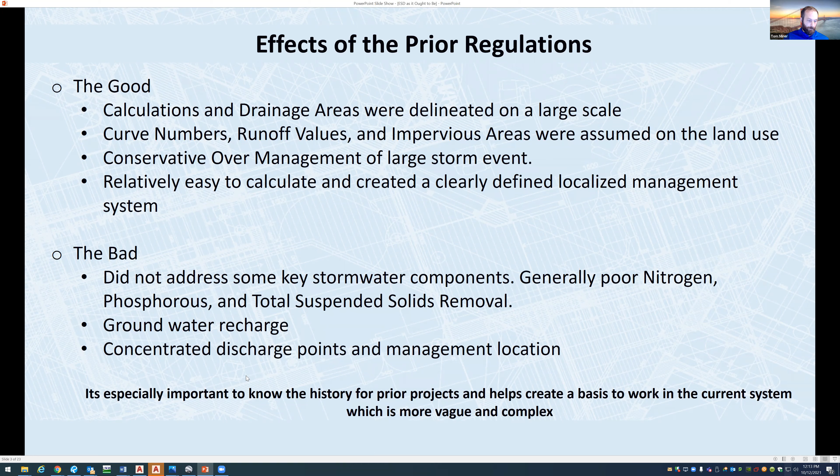Knowing how these older projects developed their calculations can help us work within the current system, so that we're not over-designing our site now if we know we have available quantity in these ponds, or there was additional water quality available, and the county or municipality lets you get some credit for that. You might be able to undertreat the ESD that's now required because we're already providing additional management.

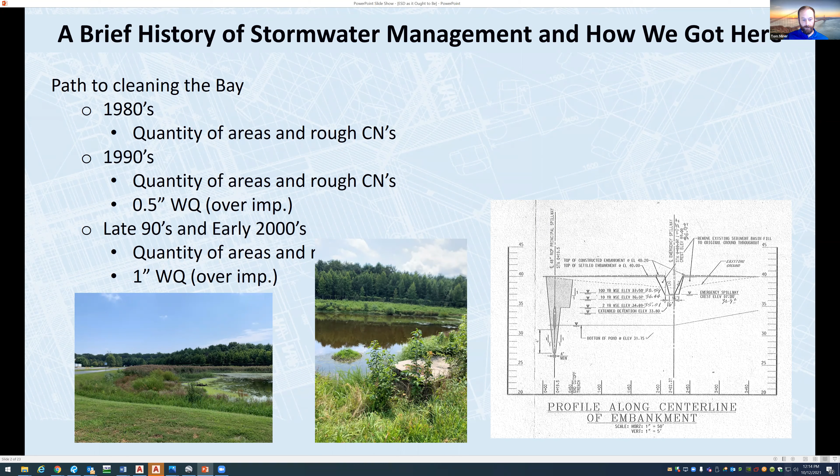So, a brief run-through of what ESD is. I think a lot of us on here are already familiar with what it amounts to.

The definition by MDE is a comprehensive design strategy for maintaining pre-development runoff characteristics and protecting natural resources. ESD uses small-scale stormwater management practices, non-structural techniques, and better site planning to mimic natural hydrology and runoff characteristics, and minimize the impact of land development on water resources.

That sounds really great, but this statement lumps in a lot of things that we're not able to change about our site. If a developer wants to put a giant warehouse on the site, we're not going to be able to have infiltration on a 1 million square foot Amazon big box.

We're going to be paving it. There's not much you can do about it. And then land development, mimicking runoff characteristics with non-structural techniques.

Certain things in zoning codes are requiring us to have a certain amount of parking, even if we want less parking, we're required to do certain things. The 2000 manual focuses on changing zoning code requirements, but there was no teeth to force the counties to do that. So we've really been given an intent without any change in our local codes to actually reduce the amount of parking, reduce the amount of roads we need, or the width of the roads typically.

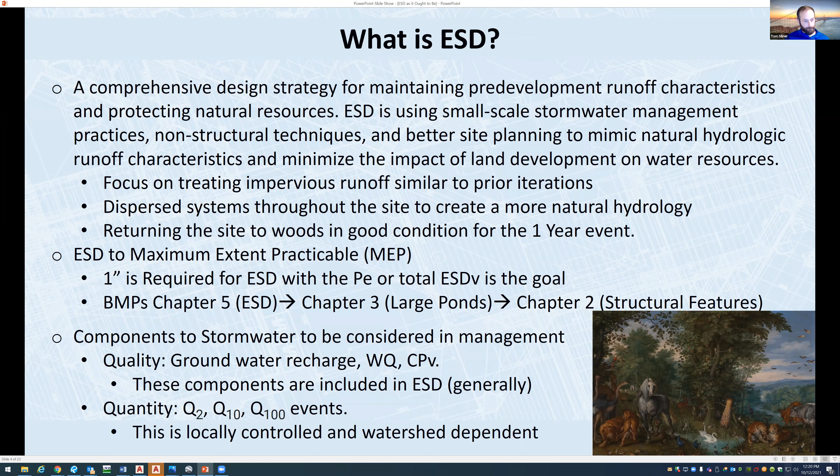Going into the complexity, I'm sure a lot of you have already done a site evaluation to understand what the calculations are required for figuring out what your ESD is for a site. There's a lot more components than there used to be. You have various study points. You typically had your soil types, but your study points are now more focused on localized points of discharge.

Your existing and proposed impervious are the same, but because you're trying to focus it on individual smaller facilities, you're not taking that kind of approximation of amount of impervious or curve number. You're taking a very specific number, a specific area that you're having to treat, because every square foot of impervious is costing you that much more to treat.

You've got to include your limited disturbance. If that changes, then you've got to change all your calculations, and that progresses through your report, progresses through your plan sheets, and it just results in a lot more accounting.

The key calculation is ESDV, which is your PE value, determined based on your impervious area. Your RV, which is your impervious area times this basically dimensionless coefficient, and then your total area, which is in square feet.

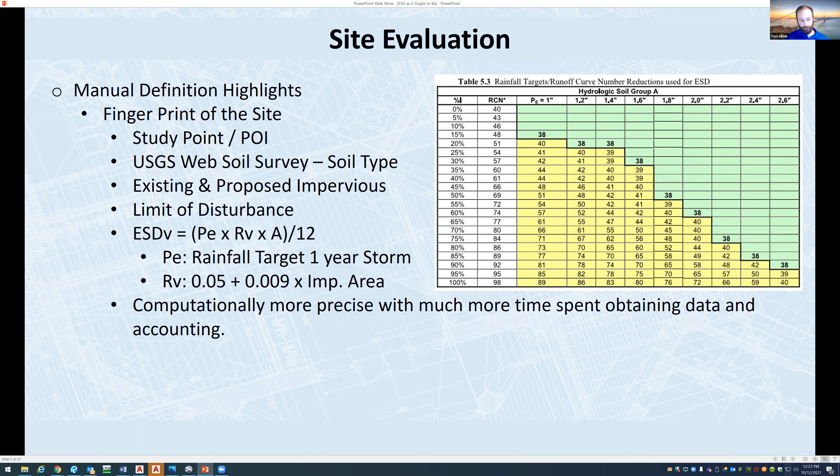Computations are much more precise at the end of the day, where it takes a lot more time to obtain the data. We can do quick approximations, but at the end of the day, when we need to do an exact site fingerprint of the ESD, it definitely takes more time than it used to with the prior delineations and prior computations that we used to work with.

Similarly, timing wise, we have to go through a 3-step process unless the county waives it—sometimes the county will waive the site requirement if it's a small project—but typically you're required to provide a concept, a site, and a final. They say it's a 3-step process, which is not necessarily really the case. There's a concept, site, and a final.

Then there's also a submission for, depending on how the county works it, a bonding and approval set and submission. So after they give you final approval, you then have to submit for bonding and signatures, and then Mylar and recordation of the plans.

And then after all of that, you then have to go to a pre-construction meeting. So if you're getting a concept approval, then you go to site, and then you go to final. If they give you final approval, depending on how the municipality works, you still might be 2 months away from being able to break ground.

So a lot of times developers are going, we've gotten final approval, what's going on? And you're like, well, we still got to go through all this other paperwork before we can actually even break ground for a permit, because after final, you're now coordinating with the sediment control inspectors. You're getting bonding and paperwork in order, your various agreements.

Some groups will allow you to submit that with the final, but a lot of times they'll want that afterwards when you're submitting the final Mylar set or the recorded set for signature, which is sometimes not part of the final process. Versus, in the past, it used to be you would just submit your documents, then they turn around, provide comments, and go through the sets of reviews a number of times as necessary to get the documents to approval. In my opinion, this kind of just makes it a much longer process.

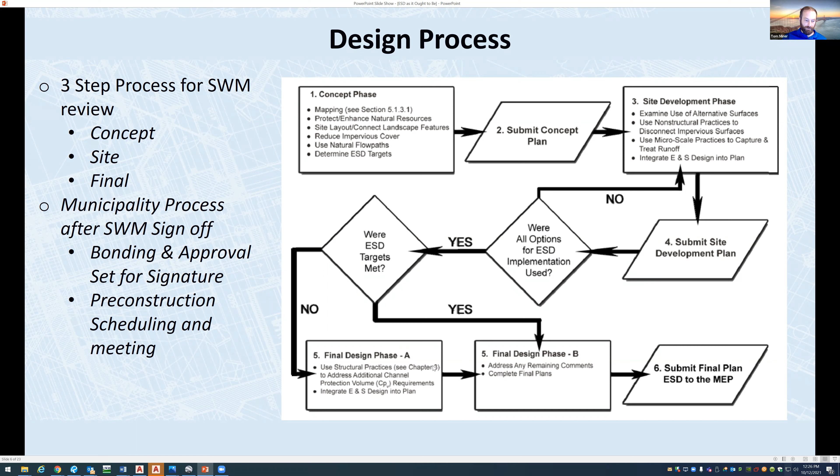And here's just their flow chart of how they kind of envisioned it to go. As you can see, there's a couple circles, which you can kind of get lost in as you go through the process.

Interpretation, intent, and then communication. I think a lot of times this particularly gets some confusion, and the reviewing agency, I'll say for lack of a better term, blames MDE for their interpretations.

The manual defines ESD to the maximum extent practicable. It defines what Chapter 5 facilities and Chapter 3 facilities are, and what's acceptable. And then it defines all these components. The definition of what they are is fairly clear.

The question is how does MDE, the review agency that reviews the MS4 permits that each county, town, or government entity has, these different permits, provide the review and compliance. MDE is going to be reviewing them based on the manual, and I found that they typically give a fairly lax review of the items. They're not, as long as you have justification and proof of why you're doing something.

There's a lot of variation between counties. So my take is if you have a lot of variation between counties, and the only commonality is the MDE, that means MDE is allowing that variation to occur. So it really comes down to the county's definition of what ESD is to them and how they want to function in this manual to allow for treatment of runoff to the bay.

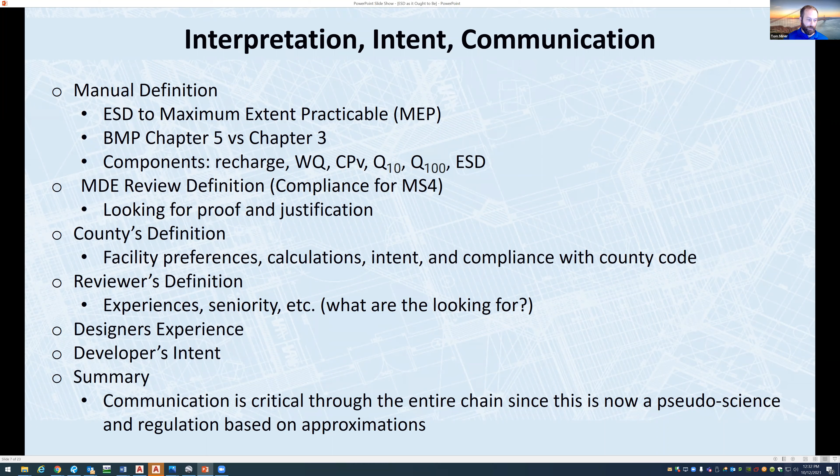Kind of hit on this a little bit. Stormwater Management Act, that was done in 2007, references the 2000 manual, and it's written in the COMAR, so it really gives very limited flexibility with MDE to revise things they found that don't really work as well. So they try to release clarifications, and those clarifications, they're trying to work within the current rules. They keep wanting to do updates, but it takes a little bit of political will to update a manual.

And then additionally, things to consider outside of all of ESD is really just how that integrates in with all the other permits and regulations we have to incorporate when it comes to stormwater, whether it be wetlands integration, buffers for floodplains that are state and federal, and then local requirements.

How does each county view these natural resources? Do they want to protect them at all costs? Do they really need to see anything, or is this something that they just need to check a box off that you show steep slopes, or check a box off that there might be bedrock showing in one location, or are you going to have to do a full report to show them that X, Y, and Z is okay?

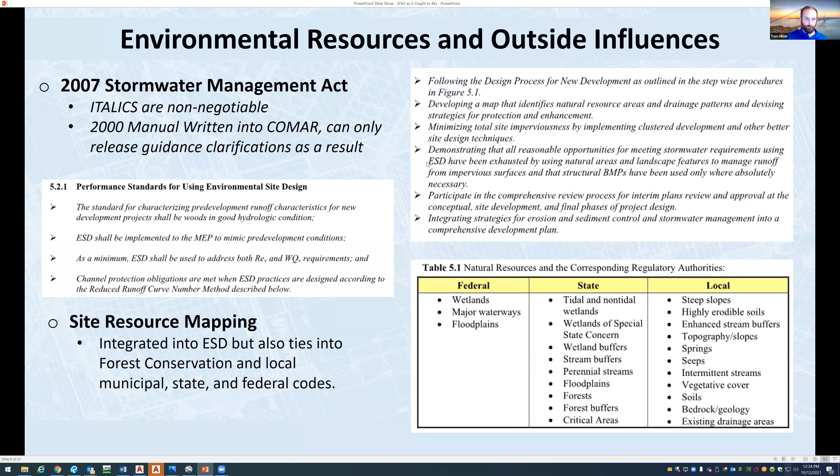So that's something that's in the manual, so the counties and the states have to adhere to it. And then, the one thing that is always interesting to me is that they have certain italicized areas in the book, and those are non-negotiable items to the county, versus things that aren't italicized, or just regular text, which are able to be worked through potentially, depending on the willpower of the county to let the engineer design according to their needs.

So the manual gave us a bunch of different alternatives. We have alternative surfaces, non-structural practices, microscale practices, but then they give a summary of site development strategies, which have very little to do with what we can do on our site, because this is really zoning code, or various codes, or site driven designs that we can't really modify. A 33-foot turning radius, I believe, a lot of streets, narrower streets, we can't change that, and the county's not going to change the roadway code and various rules to meet these requirements.

So some of these things, when you read them, you're like, okay, great, they obviously didn't think through some of this design, because they're putting it in the manual like, this is how you're going to meet these practices and design accordingly, but it had nothing to do with stormwater management. It really just had to do with zoning requirements and site layout, which we have very limited flexibility in, depending on the type of use.

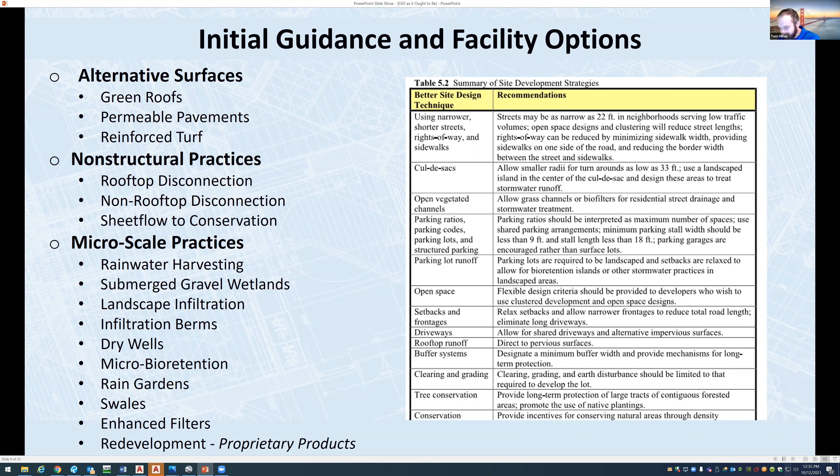So going through just a quick, I know a lot of people are probably very familiar with the type of uses for this, but there's a bunch of different types of practices, and I found that all these practices fit for a particular use. And when I get into a site, I see what the site is, and then I can use that application in this location, I can use this application in this location, really with the focus initially of cost, but then not just cost, but then how it encumbers the property later, and then the kind of maintenance costs that someone's going to have to bear later with that as well. So your maintenance, your cost to construct, and then how it impacts someone's property after that.

I mean, if we provide a green roof, it might be great, and the client might even be willing to build it if they're selling the product at the end. But is the homeowner going to want to maintain a flat roof that they have to get up on there and mow every other week? I know I wouldn't. So green roofs, if you have a client that wants to do that, that's great. I would probably charge them a higher fee, just because if they're willing to spend that money on a green roof, they probably have extra money to spend elsewhere.

It becomes a semi-impractical item. It requires a lot of structural design components to support all the additional weight. They only treat themselves, so it's an extremely expensive way to provide self-treatment. It looks cool, but it's the most expensive way you can provide very little treatment for a site. But if it increases the marketability of a site, maybe it's worthwhile.

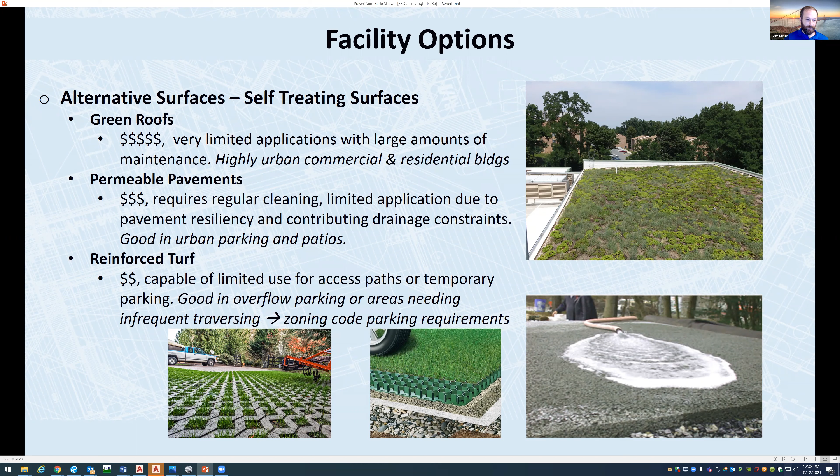Reinforced turf is definitely a more applicable need for certain sites, particularly areas like churches where you have overflow parking lots and the zoning code allows it - where you're only going to need it once a week or once every few months, for traversing a site, and you don't want it to get all rutted up. I've used that frequently, and it's a good product. It's not terribly expensive, and it's cheaper than a parking lot. So you get your permeable surface, and you don't have to build a parking lot if you are allowed to by zoning code, to provide your overflow parking, or if you don't need as much daily parking but still need it in peak conditions.

Other items, particularly rooftop disconnects - the non-structural practices are great, but they do take up a lot of room for disconnection of runoff, and you only get 1 inch of treatment. So in municipalities that require greater than 1 inch for full ESD treatment, this only gets you partially there. Depending on the municipality's interpretation, this can be a limiting application. However, the more lenient municipalities, this can be a great way to just not even have to install a facility.

A problem with non-rooftop disconnections and sheet flow to conservation is you are encumbering that area that's supposed to be lawn - you can't build anything there in the future. If you have to build something there, then you've got to do a whole other stormwater management practice to mitigate for what you're losing with your disconnections. But they're all very cheap as long as you have the land.

The biggest difference between non-rooftop disconnection and sheet flow to conservation is in the pathways, for paths - this is a path we did in Harford County. It was convenient because we had slopes less than 5% in some areas, and we just had to put in a level spreader downstream of the path, which was just some 57 stone, and then we could have that sheet flow off into the woods, which was going to stay woods perpetually. So it was basically a free alternative when building our path to get credit for it.

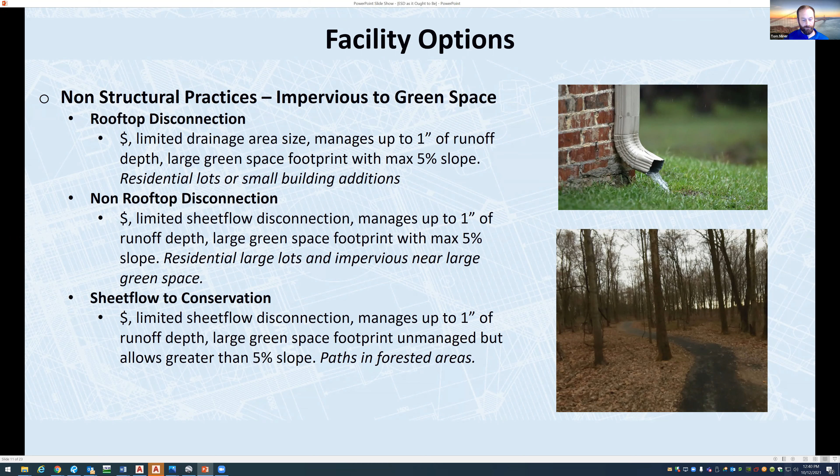But all these practices are really good when you have a lot of space. They start to really fall apart as soon as you get into more dense urban type settings or where land values are very high.

Microscale practices - this is kind of the bread and butter for a lot of ESD. Rainwater harvesting is very rarely used. I feel like it's quite hard, particularly in Maryland, to need to harvest. We're not in an arid environment, so typically we don't need to water our plants excessively unless maybe we're at a golf course. So to spend the money for rainwater harvesting for watering doesn't make much sense.

And then when you look at purple water reuse for sewage, there's just not a lot of demand for a facility's purple water versus the amount of runoff you obtain during a rainwater harvesting event - it's very minimal, and you're having to put in tanks and pumps and everything else. So there's occasional use where it's applicable in high urban settings and things, but it's fairly rare unless you have a particular want or need for it.

Submerged gravel wetlands are typically my go-to when we have poorly drained soils. Some municipalities are resistant to their use because they think it violates the spirit of ESD, but it's probably the cheapest and most efficient way to treat a lot of runoff with ESD. The benefits are fewer facilities and concentrated flows, typically at a low point on the site where soils aren't great. What you usually have to do is provide the submerged gravel wetlands, then add microbioretention somewhere else on the site to show you're meeting ESD, at least in spirit.

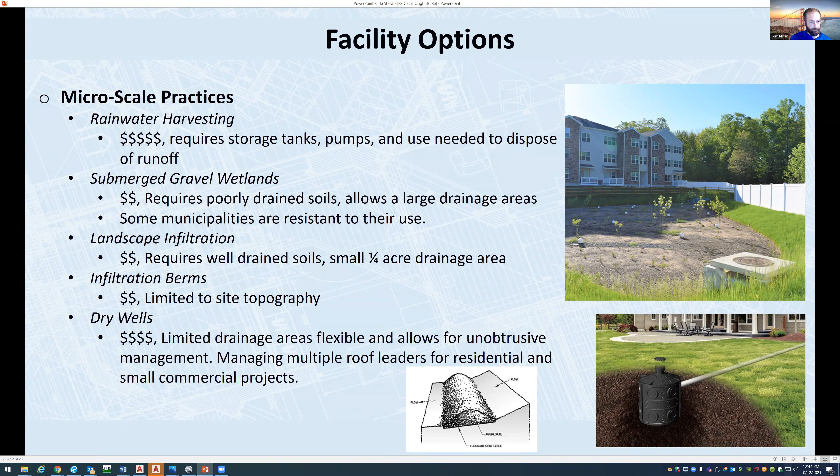Microbioretention is the typical facility everyone uses, really common. You can do a couple different things with them - they can become somewhat structural, similar to a Filterra, or you can put them in boxes. I'd say about 80% of the facilities are microbios or something in that swale bioretention, bioswale type layout, where you're putting filter media in, putting an under drain or letting it infiltrate into the ground, with small drainage areas to each one.

Rain gardens are very similar, except they don't have under drains and are usually a little easier and cheaper to put in. But they do have the limitation that you want decent infiltration for a rain garden, so you need type A and B soils.

Swales are great for linear features - roadways, paths, things like that. I like to put a swale, if we need a bypass swale or need one on the site to catch runoff and send it somewhere else - it's a good way to widen it out a little bit and provide some stormwater management, even for free, if you need a swale anyway to shift it around a house or roadway. Bioswales can do the same thing, just get a little more bang or more treatment.

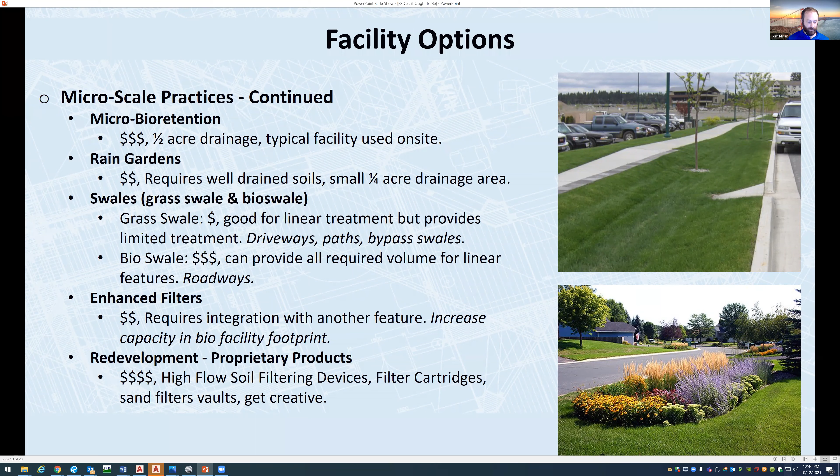But bioswales do take a little more time to construct - you're having to put special under drains in and media, so just be aware of that. I'll try to move a little quicker since we're out of time. Enhanced filters are basically just underground stone vaults, or underground stone underneath some microbios or rain gardens. And then everyone's seen various filter cartridges, Filterras, and things like that. They're good alternatives, but they're usually required in redevelopment sites or very urban settings where you don't really have other alternatives.

There's a lot of interpretation differences across various municipalities. This is just a list of ones that I kind of have, so when I sit down in a new location or with a reviewer I haven't really talked with before, I can talk with them about what their thoughts are and their intent.

So then we can really design the site accordingly. Some of the questions: is ESD going to be required for the full site or just for the 1 inch of the event? And then what is maximum extent practical? What is reasonable to them? You know, ESDv versus ESDv and IART.

State and federal projects have an IART requirement, which stands for impervious area requiring treatment. So you have to treat all of the impervious area or show why you can't treat it all. That becomes very difficult and sometimes impractical, and there's a lot of effort that gets put into that.

And then I'll just go through these quickly, like hydrology. Are they going to be really picky about the hydrology of the site? Do you want to be reviewing that with them initially so you get their buy-in, so you're not having to redo all your calculations? There are a number of different ones, and you'll find that as you go through different municipalities, they all interpret everything just differently enough to throw you occasionally. So it's good to have a list of questions assembled before you go in, knowing what the common trip-ups are.

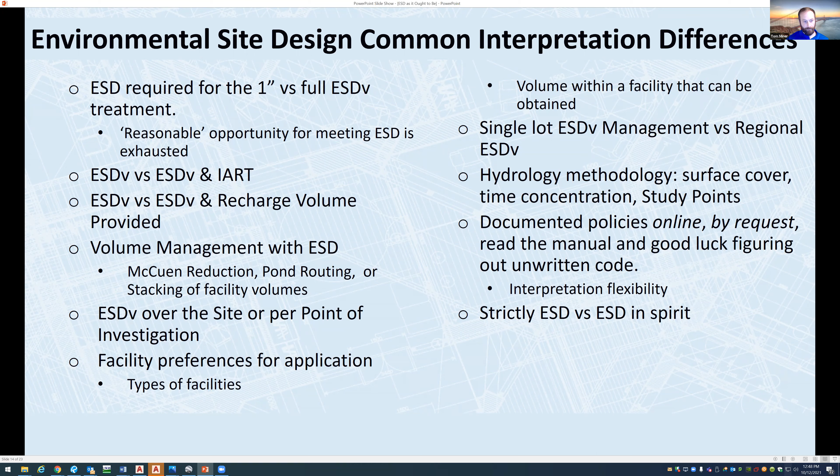With the ESD regulations being intent-driven, I always find it's really good to have a concept of how I want to manage the site very early on, present that to the reviewers in the municipality, and try to get all the questions ironed out. Sometimes the meeting can last a bit because, if you haven't worked with them a lot before, you're poking at various weedy questions that can potentially trip you up. But during that conversation, you're kind of getting what they think the intent of ESD is, and a flavor of what that reviewer or jurisdiction feels is their responsibility to review.

And then when you're doing your layouts, considering the cost, land utilization, approval times, all these items should be considered when siting your facilities, along with what the site actually needs to accomplish the developer's goals. Because at the end of the day, stormwater management is something that's in the way of development effectively - it's a means to an end, not the goal in and of itself.

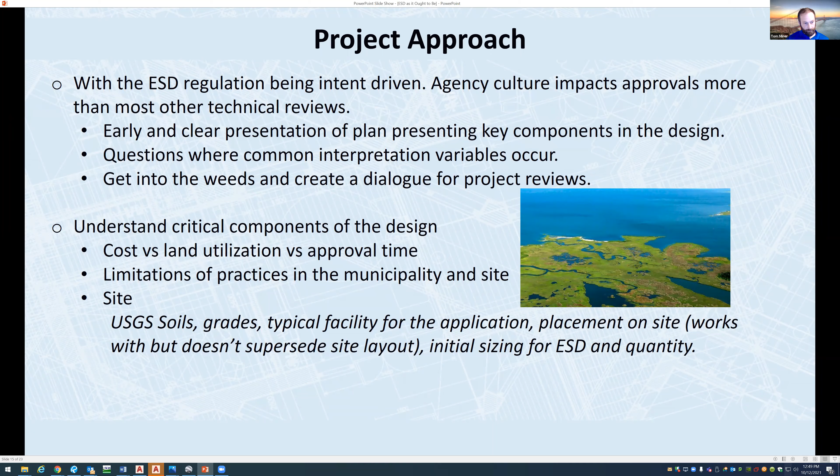Let's see, we got 1250. I'll go through these real quick.

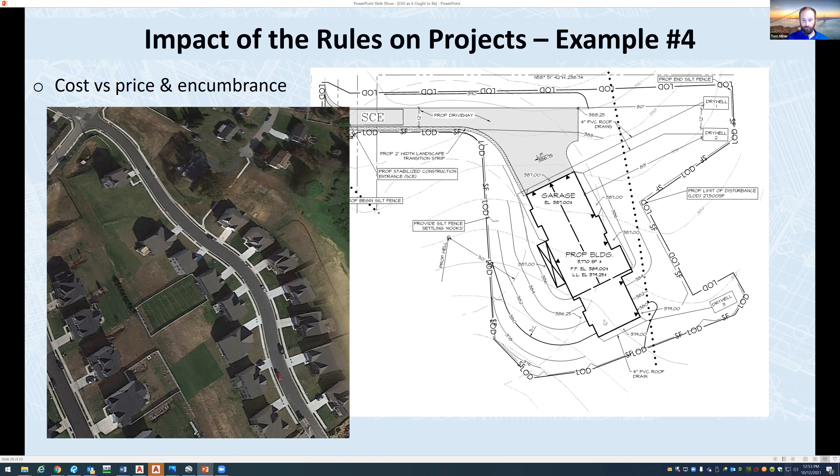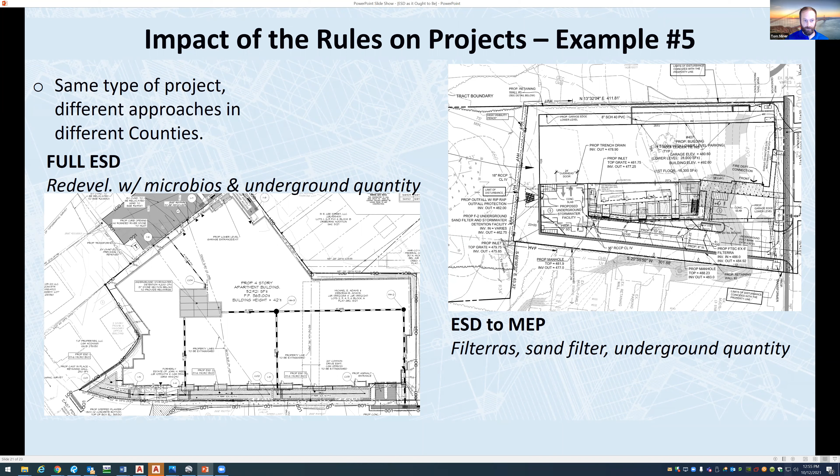So the best way we can solve that is to have a better line of communication with the reviewers and with the municipalities, and then also have the reviewers and municipalities trust the engineer more than I feel like they typically do in most cases.

Urban locations are usually a little more hesitant to trust the engineer, and they try to rely more on code and their interpretation of it, so that they can be at least consistent throughout their municipality. Versus more rural areas, I find that they tend to be more logical—not that the urban ones aren't logical—but they generally let the engineer do what they think is best.

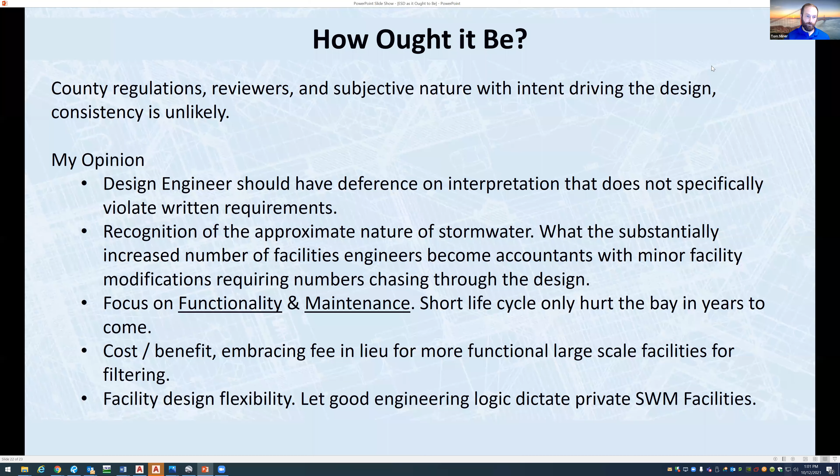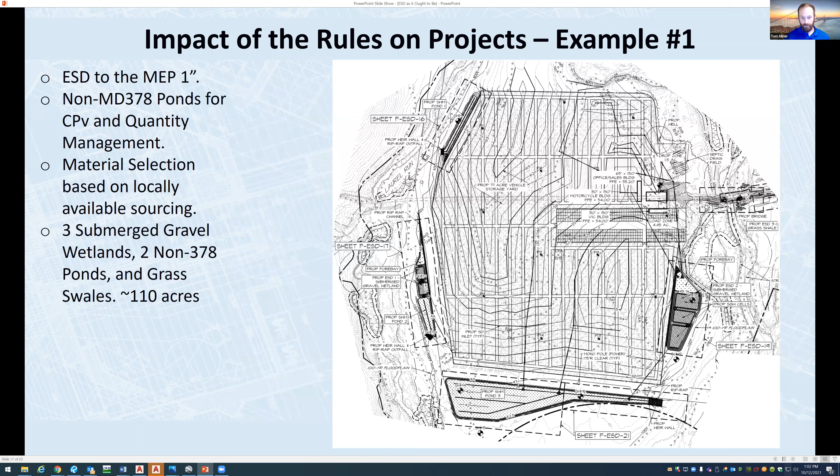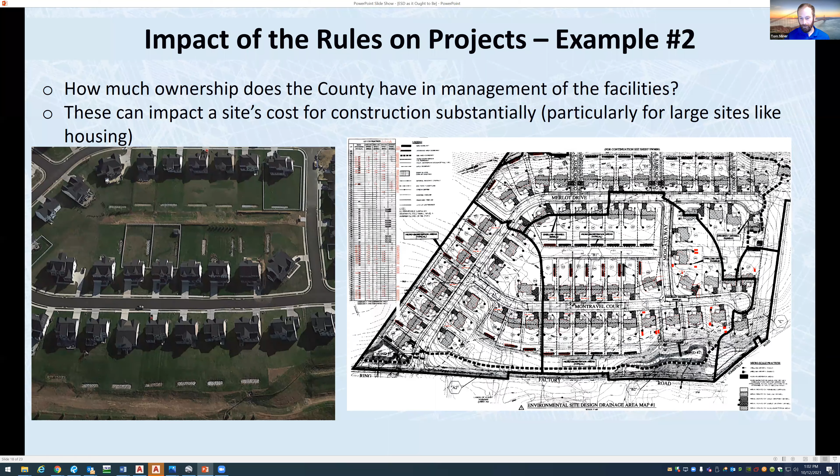Cecil County, a lot of these projects - for this site, this is Cecil County, they said, yeah, do a submerged gravel wetland. It's a giant parking lot for 110 acres, just do the 1 inch, and then just do CPV after that. So you have two locations right next to each other with completely diametrically opposed viewpoints on how we should be managing it. MDE neither supports nor, in conversations with them, I found that they're like, it's up to the county. So you have the same code, the same book, and they're applying themselves completely differently. Like I was saying with this site versus this site, I said $25,000 - I can't imagine it's probably more than that. It's probably closer to like $35,000 per lot, versus something like this that, ignoring the storm drains, is probably closer to $5,000, if that. So it really comes down to the reviewers, or that stormwater management group, and how they view their edict from MDE should be performed and reviewed.

So great. Carrie, any more questions do we have? No, sir. Tom, that was absolutely a terrific, very educational, wonderful presentation.